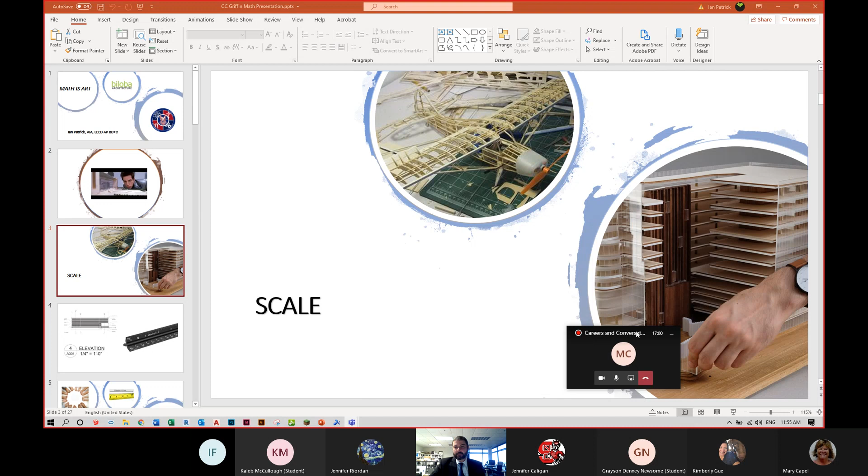We have to present things to clients in various different ways, and that includes building models. That could be, as some of you may have built model airplanes or model cars or things like that. We also present models to our clients in various ways, and one of them is to build actual physical models. Because obviously you can't show them a building at full scale, because that would be basically building the building. So you have to show them what your vision is for their building. And in order to do that, you have to be able to scale up and down your model depending on what size model you want to build.

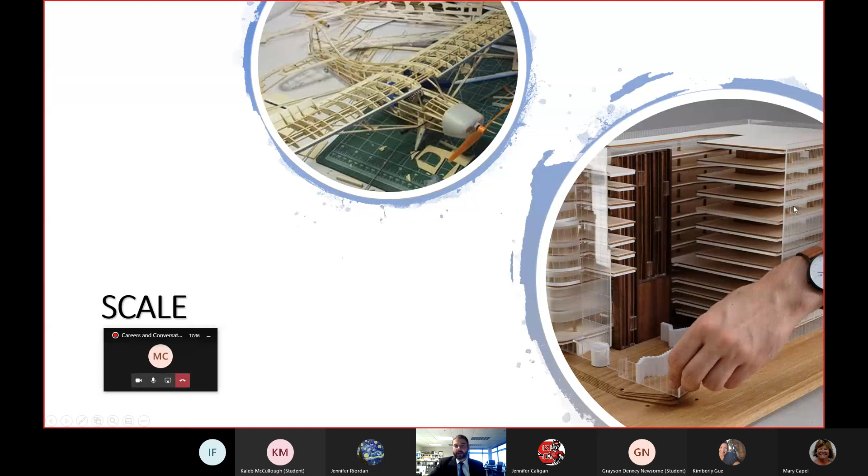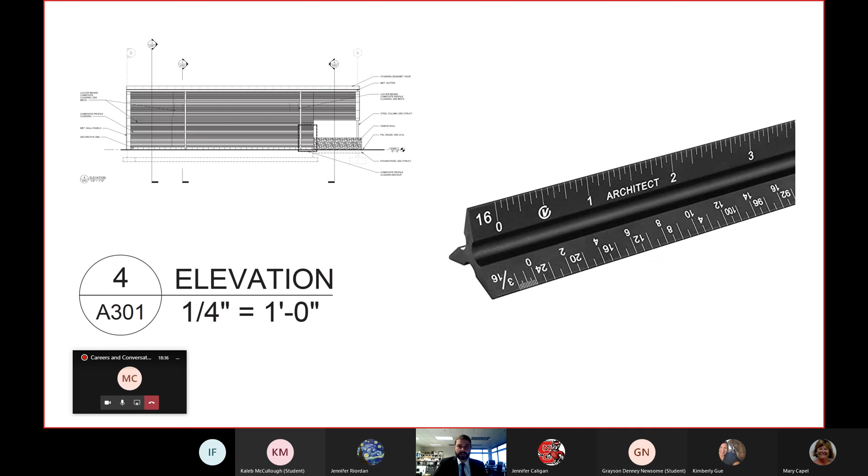There are many different measurements, imperial and metric, as I'm sure you're all aware of. In the United States, of course, we use feet and inches. If you didn't know, it's kind of an interesting fact that the name foot and the actual size, the 12 inches, started out by about the size of someone's foot. Now, of course, that sounds ridiculous because everybody has different size feet, but that's sort of the way it started. Most of the rest of the world uses metric, so centimeters, meters, and if you've studied base-10 measurement systems, everything's really easy because you can just multiply or divide by 10, 100, or 1,000. Sometimes we do federal projects where they require us to use meters and centimeters, but most of the time we use feet and inches, and I'm sure you've been learning about that.

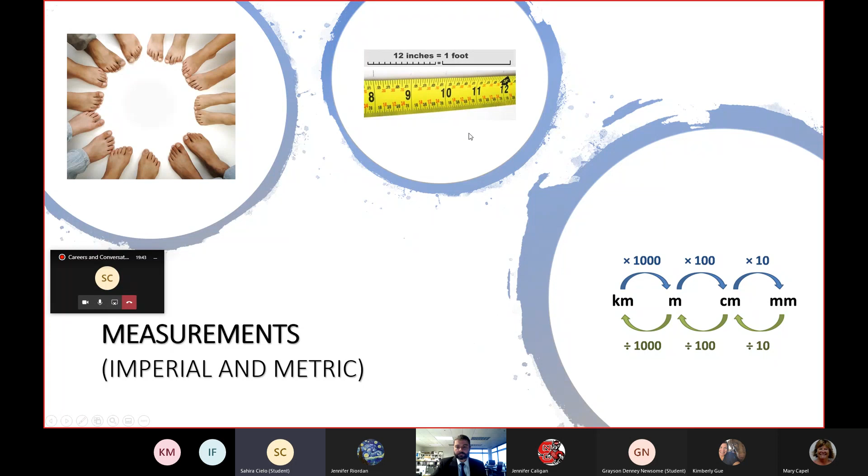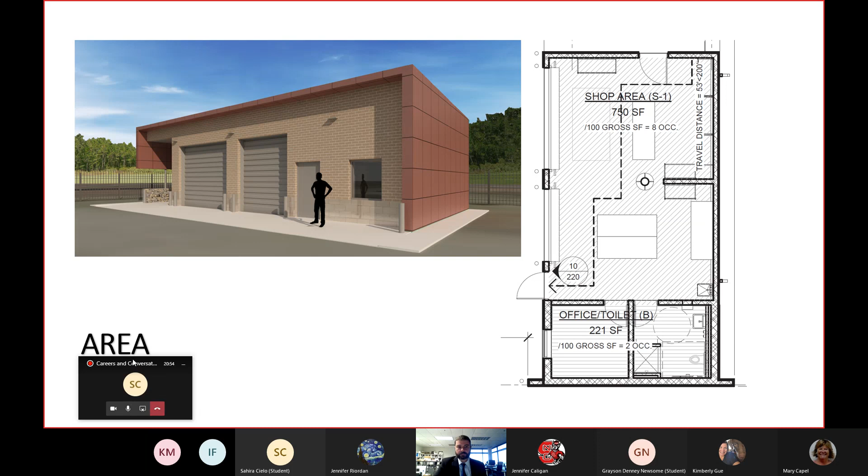Another thing I want to point out - if some of you are around town and see brick buildings, this is something you may not know. We actually use different kinds of dimensions on brick. If you look at the corner of a brick building, you'll see that's actually a full brick, meaning you don't want to cut a brick when you get to the end of the building. You really have to plan out your buildings based on the size of the material you're working with - we call those dimensions actual versus modular.

This is a pretty standard brick - 7 5/8 inch wide, 3 5/8 inch thick, and 2 1/4 inch high. We have to use those dimensions to make sure the building we design doesn't have a bunch of cut bricks in it, because if someone in the field has to cut 1,000 bricks, it's going to take more time and the building's going to cost you more money.

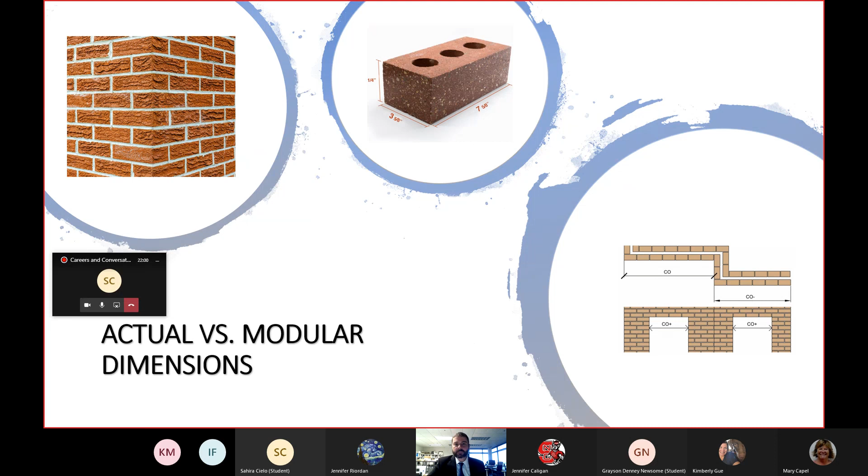What we do is we actually have a dimension we can work to, because keep in mind there's also a joint between the bricks, called mortar, that basically glues them together when laying a building out. If it was a good architect, they would have figured out it's going to take this many bricks plus the joint width to have a really nice clean line where we didn't have to cut any bricks.

So when you're at home, if you have brick on your house, or when you're out and about, check it out - you'll see if they had to cut bricks at the end, or if the architect really planned it out and could have a full brick and turn the corner and keep going. You'll see that the modular dimension is actually 8 inches. If you have a 7 5/8 inch brick plus 3/8 inch for a joint, you end up with a nice clean number, 8 inches.

So let's say you have a door opening. If you wanted a clean door opening where you didn't have any cut bricks, you might have a 24-inch door opening because 24 is divisible by 8. So you can use that 8-inch modular dimension to make sure you have a nice clean building.

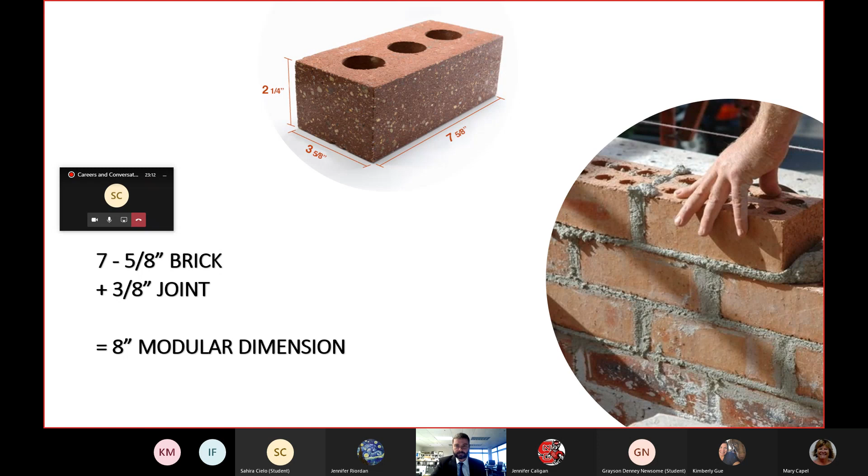And we do that for everything in the building - it may be number of toilets, number of doors - we calculate all those up and add them together and say here's how much your building is going to cost. For contractors, it gets even more difficult - how many bricks am I going to have to order to build this building? You've really got to learn the basics of the mathematics so that when it gets to more complex situations, you can properly estimate it and order the right amount of bricks, and then you usually add about 10% for waste or broken bricks or things like that.

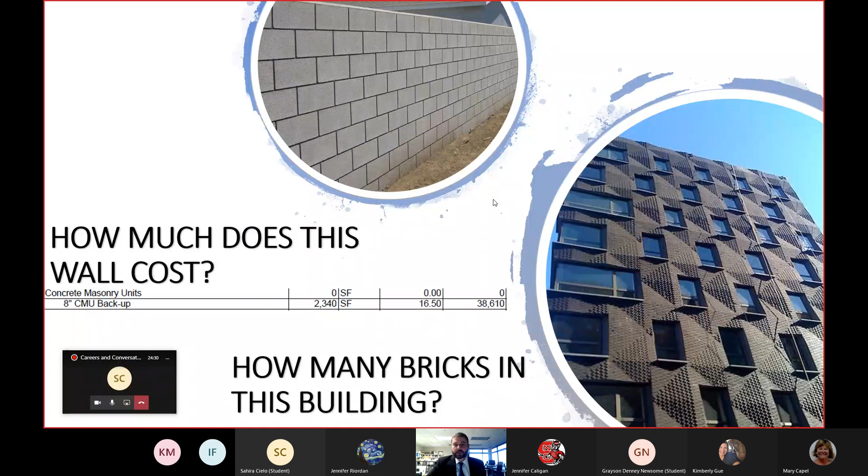So let me get to some more fun stuff on my next slide.

One of the great things discovered about nature was that proportion is embedded in it, and that's one reason we find things beautiful. It's why architects use proportion to their advantage—if we understand why a flower petal is beautiful, there's real math behind that, and architects can use that math to design beautiful buildings.

This is a nautilus shell on the left, and it's actually in proportion to the golden section—a big buzzword in architecture. The golden section is a proportion of 1 to 1.618. It seems like a trivial number, but it's not.

The drawing on the right was done by Leonardo da Vinci, called the Vitruvian Man. Da Vinci found that even our own bodies are divided into this golden section, 1.618. You can try this at home: take a tape measure and compare the distance from your belly button to the top of your head versus your belly button to the bottoms of your feet—you'll get 1.618.

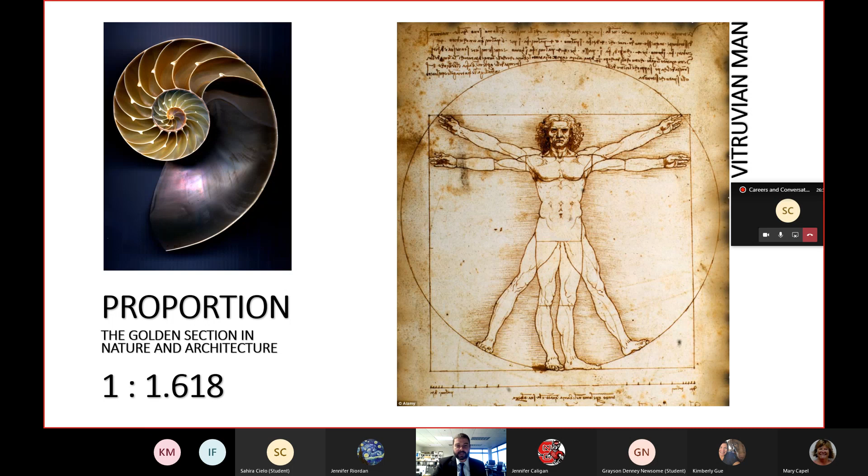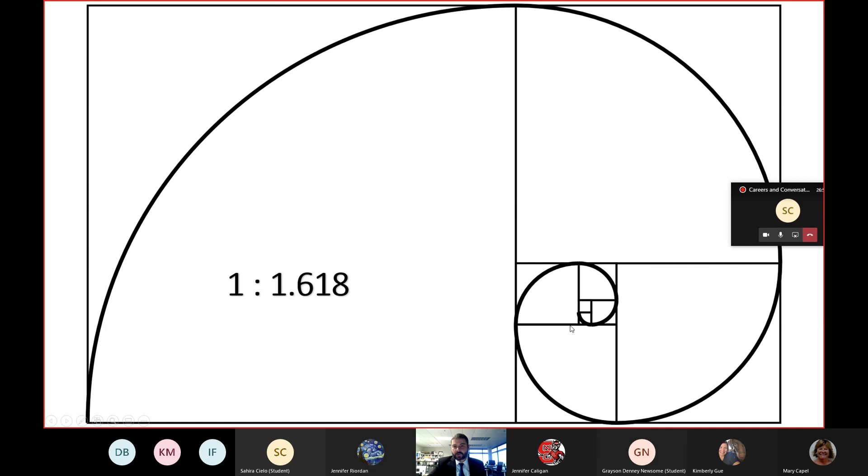So that's the visual representation of 1.618. You can see each square—this overall rectangle is in proportion to this rectangle, and you get 1.618. Do it again, this square to this smaller one, and this one to this one, then connect the corners, and you get this beautiful spiral found in nature all over the place.

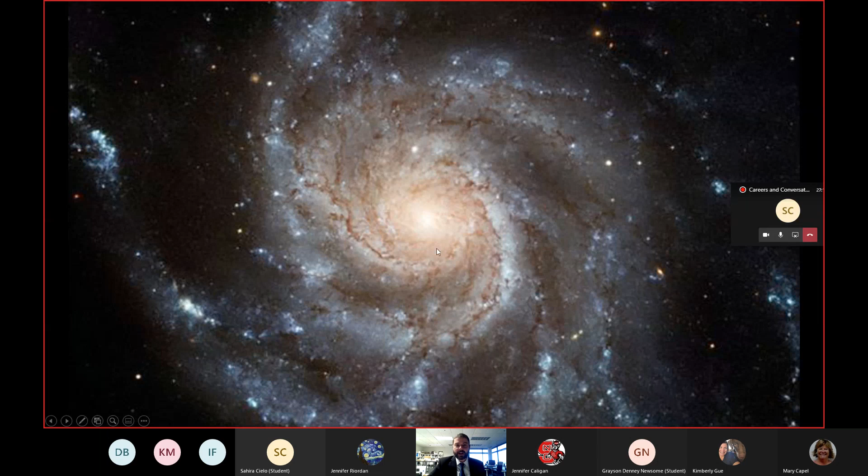You'll even find it in the very large. This is an image captured by the Hubble Space Telescope, and you can see the spiral again—it occurs at all scales in nature, from the very large down to the very small.

This is a moth—you can see it in the eye pattern as well as the tongue they use to stick into flower nectar.

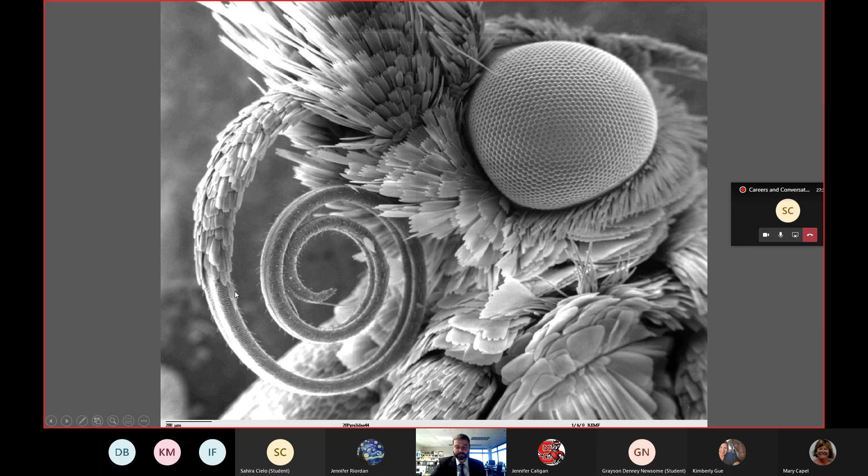Again, architects started realizing this. If you look at the proportions of the Eiffel Tower, you'll get the same 1.618.

Back when the Greeks and Romans were going through a change in how they designed buildings, they decided they could use proportions to design them. Looking at this drawing of the different types of columns—some simple, some complicated—you can see, for instance, that the diameter of this column has to be 1/7 of the total column height. That created a proportion for them that was beautiful, so they could make beauty by using the math behind it.

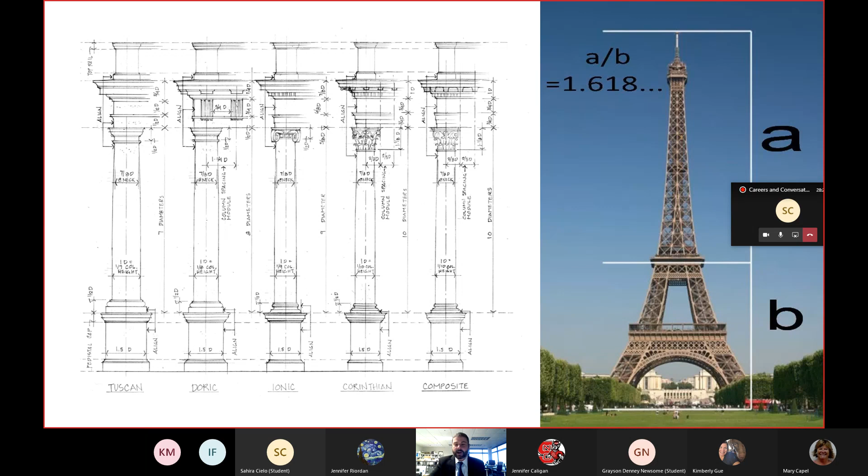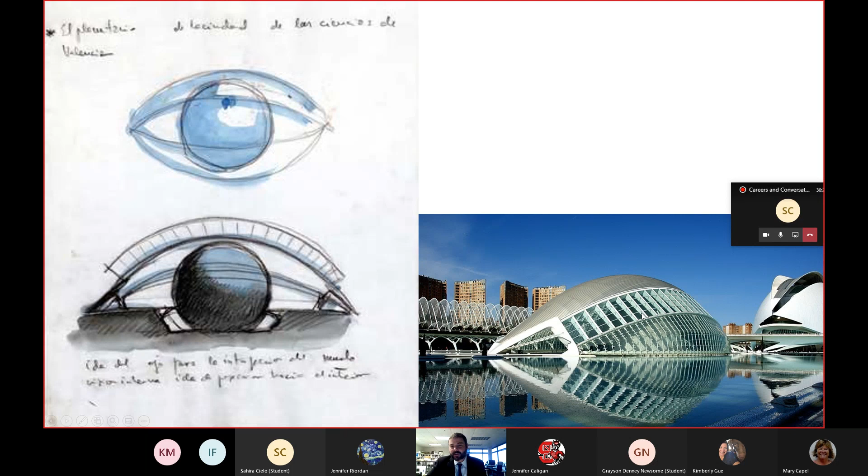More specifically, here's an architect from Spain, Santiago Calatrava, who really takes the human body into account when designing his buildings. On the left is a watercolor—he does lots of these paintings—and then brings that into his buildings. You can see it on the bottom right here; it resembles the eyeball with an eyelid, and this building actually opens up, believe it or not.

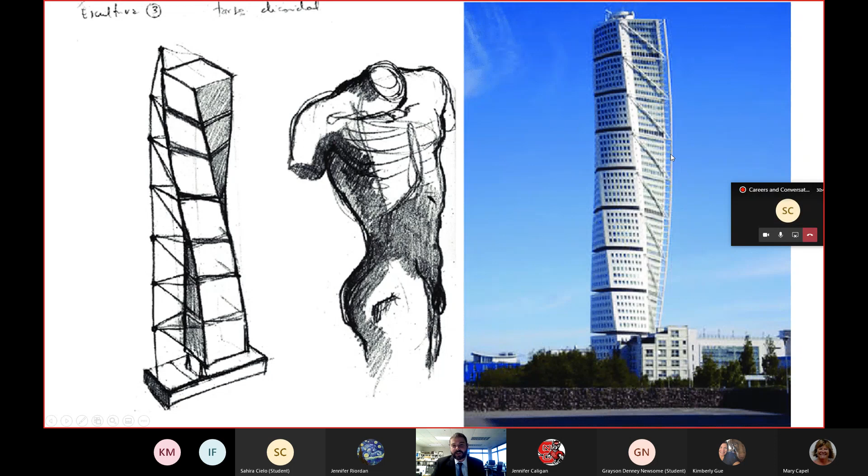He figured out how your body might move and tried to mimic that into a building. Again, that relationship between ourselves, nature, and the buildings we make is very important. Here's another one of his.

This is the Milwaukee Art Museum, a beautiful building based around a bird in flight. This one moves as well, and I actually have a video, a time lapse, though it's brief. You can see how, as we got more sophisticated and able to use computers to help design buildings and do complex math, we figured out how to make a building open like a bird's wing. Since it's right on the coast, it has that beautiful bird in flight thought behind it.

But you've got to learn the basics first so you know how to tell your computer what you want it to do. If you get a chance to go see this building, I highly recommend it. It opens a couple times a day, and they let you know when. Let me go back to my presentation here.

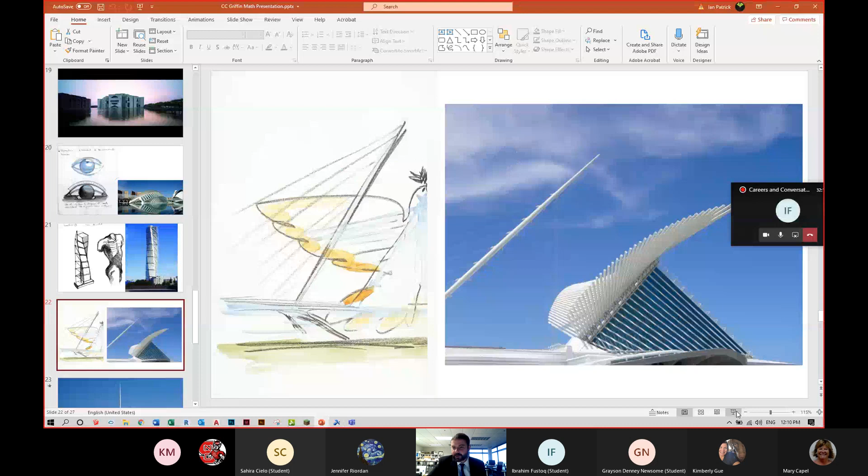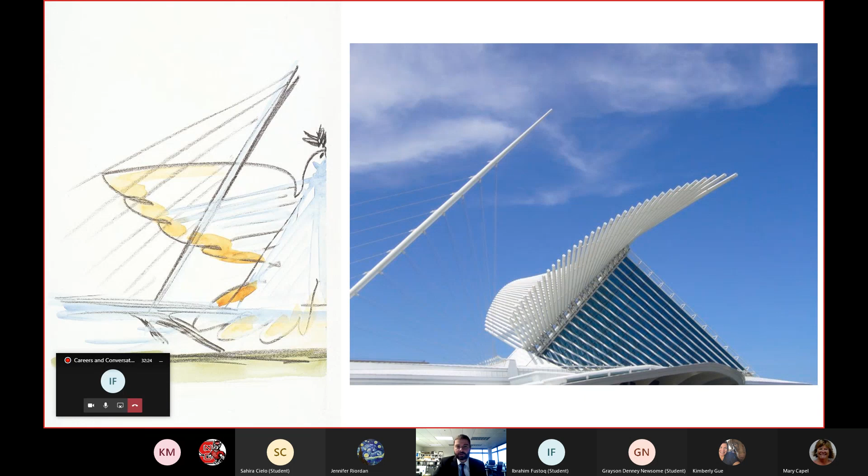Let me advance the slide here — that was the video that wasn't working so great for me. Here's another, this is actually an Arab architect.

She's no longer living, but her name was Zaha Hadid, and she started doing really complex geometry, also based on proportion. Remember when I was telling you how to estimate a brick wall? Think about how you'd estimate the cost of this building, or how many panels you needed, or which panels are the same size. We have computers to help us now, but we still have to have that artistry and figure out what is good in proportion.

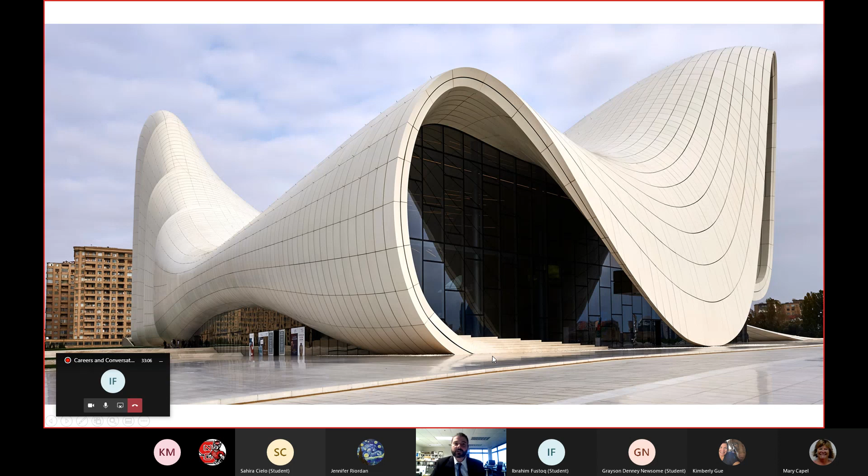And then we can use our computers to help us construct them and tell us how much it's going to cost.

This is actually one of our buildings — it's a building inside of a building. The purpose was a recording studio for a local college in Greensboro, UNCG. We wanted an interesting paint scheme because we knew we didn't have a lot of money. It was a very low budget project, but we have to paint the wall anyway, so is there something interesting we can do?

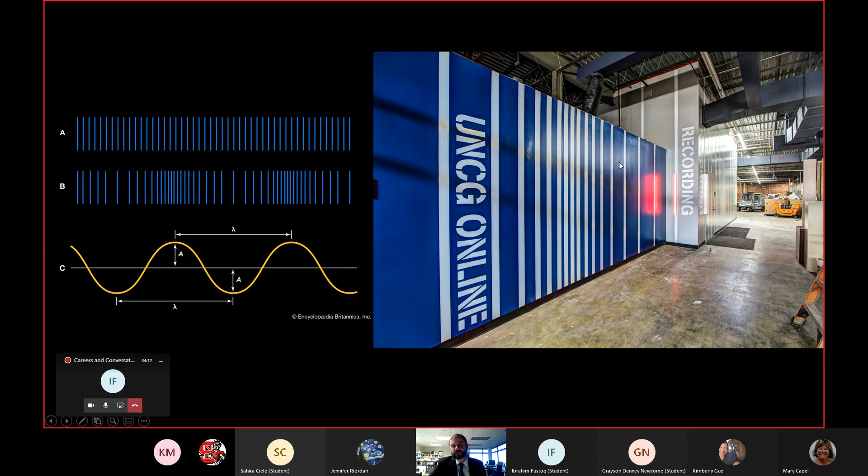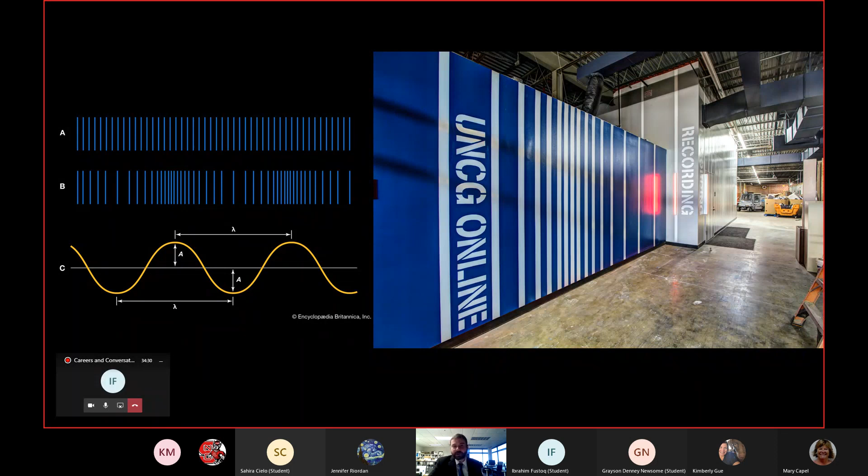If you look on the left, this is actually a sound wave, and up top is a visual representation of it. Think about a wave in water — if you drop two stones and see how those interact, you get this interesting line pattern. We said, well, we can use that pattern and project it onto the wall to get an interesting paint scheme that we didn't just come up with out of nowhere. We used the mathematics and the use of the building — a recording studio, where sound is very important — to help us design it. We didn't have to be that creative, we just had the idea, and then we let the math and nature tell us how to lay it out.

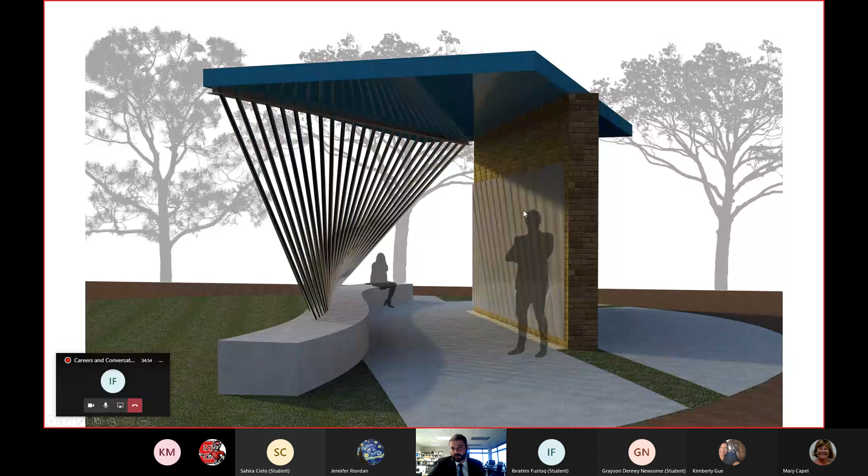This was another one of our little projects — a bus shelter. It's about what happens if you take a curve on the ground and connect straight lines up to a straight line above, and what kind of interesting pattern you might get. The curves and sizes were all based on proportion, which is why we show the people here in a dark silhouette. So again, going back to how the mathematics, the proportion, the scale all can inform a design and a beautiful building.

I really encourage you to start looking around at the buildings you walk in — your schools, courthouses you visit, hotels, things like that — and try to think about how the proportion makes it look beautiful. Every once in a while you'll find a really bad building, and see if you can talk to yourself about why that just looks weird. Is something off with the proportion? Are the windows too small or too big for the building? I really encourage you to think about how math, and the beauty of math and nature, can help you design things.

Before I take any questions, I just wanted to say that I got into architecture by accident. I always built things when I was a kid and made things and worked with my hands, but I was also really good at math and science.

I went to visit a couple colleges with my dad, and we got stuck in traffic and missed the campus tour. Fortunately, we just decided to walk around a couple of the buildings and see what we could find. We wandered into the architecture building, and I decided to put in an application. I only had a week to do it. I put the application in, got accepted, and then had the most wonderful teacher for my very first class in college.